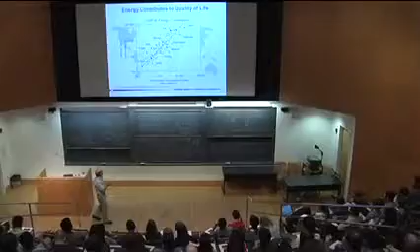This next slide makes this more quantitative. It's a plot of per capita GDP, gross domestic product, on a logarithmic scale, and energy consumption, kilogram oil equivalent per person per year, also on a logarithmic scale. You can see the relationship among all these nations, the developed nations up here.

The point I made earlier: these folks want to have that energy, not just to enjoy it in an indulgent sense, but so they have access to health care, education, lighting, heat, all the things we value so much for a decent quality of life.

The other thing interesting about this slide is look at where some of the large populations are today, and they are developing. You can conclude immediately there's going to be a big increase in the demand for energy as those nations develop. It's unavoidable. Our mission is to try to improve access to clean energy, and combustion, of course, is a gigantic part of that.

You look at that last slide and think, well, I'm just a graduate student trying to do research on a diffusion flame. How can I have any impact? Let me tell you, you can have an impact.

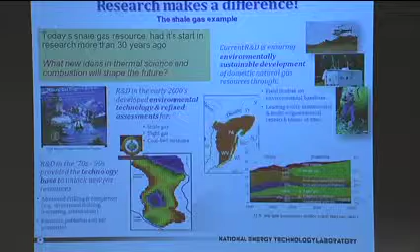I wanted to put together probably the best example I could find, and it's our own laboratory, my laboratory. You've probably heard about shale gas. Raise your hand if you know what shale gas is. I've got to make sure I know who I'm talking to.

It's transforming the energy industry in the United States within the last 5 years. There's been huge development of the shale gas resource, much of it right in the area where I live, over here in New York, PA, West Virginia. That's the Marcellus Shale Formation.

Do you know why we're able to extract so much gas from that formation? Because of work that was done in our laboratory back in the 70s and 80s: advanced drilling, horizontal drilling, being able to steer a bit and run through a formation horizontally. At that time it was called stimulating the well. Today we call it fracking. That was stuff we were working on back in the 70s and into the early 80s.

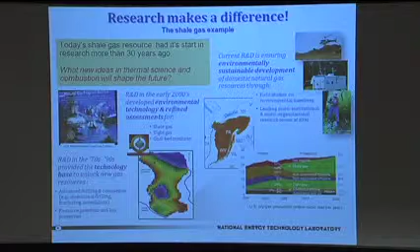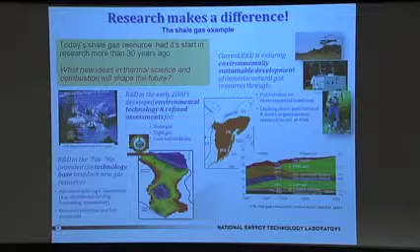Some of the people I started my career with, who have now retired, were developing that. I talked to one last week about his experiences. What an achievement to think that work we were doing, that frankly not a lot of people were paying attention to—they said it's too costly, too complicated, it'll never work—is changing the energy industry today.

Now, we kept working on it, frankly on not a lot of funding through the middle years, looking at where the geological environments were where this would work out. There was work going on, and then finally it just took off.

Look forward in time at the percentage of natural gas we expect to be supplying from those shale resources in the years ahead. It really is changing the energy industry.

Today, our lab's focused on making sure we can recover that resource, guaranteeing environmental sustainability. We don't have any problems with recovering that resource, so we're still working on that. But look at the time scale, 30 years—it's amazing. I'm putting this slide up because many of you are working in energy, thinking how can I have an impact? I'm trying to put forward a couple ideas.

It takes a while. It's not always going to be people saying you're working on the right thing. That's what's happening back here. But it pays off eventually. It really does. So I want to encourage you, keep going on that research you're working on.

You might think, oh, Gio, you picked an example here. These guys, they had it made. They were looking at something to supply a brand new fuel source. That's going to have a big impact. Well, let me give you an example. You think, well, my combustion design, I can't have that big impact on fuel supply like these guys did.

When I leave on Friday afternoon and drive back to my house in Morgantown, it will take me almost exactly one tank of gas in my little 4-cylinder truck. It'll just about be on E when I get there. Somebody in this room is probably working on an HCCI engine that in 20 years, I'll be able to take that same trip, and by the time I get there, same horsepower engine, I'll probably have 10 or 20% of that gas left. So now I get there and I open the tank and I look in there, you know what? I just discovered a new energy source, didn't I?

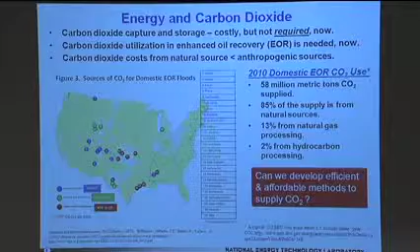You can't talk about energy today without also discussing carbon dioxide. This has been touched on a little bit yesterday. You can capture and store carbon dioxide from stationary power plants. We'll talk about that a little bit. If you would have asked me 3 years ago, I would have said it's going to happen, all right? Today, it's not so obvious we'll be doing this in the near term because of changing economic conditions, and there is actually a lot of debate on storage.

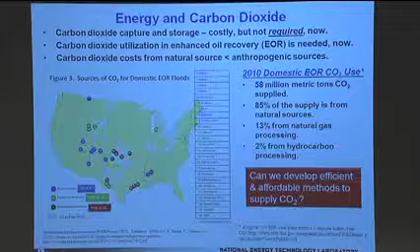Last week was congressional testimony to really question some of this. I don't know if that's the right testimony or not. I'm just telling you, this is in the middle of the crosshairs right now of a huge national debate. So will we see carbon capture and storage? I don't know.

But something that many people are not aware of, carbon dioxide is a valuable commodity today. It's used widely for enhanced oil recovery. Did you know that? If you knew that, raise your hand. I just want to see. There's a few people that are aware. It was mentioned yesterday, just a moment. But you might not be aware of how significant that use is.

In 2010, 58 million metric tons of CO2 were supplied to operating oil fields. 58 million metric tons, that's the equivalent of about the CO2 emission of 15 coal power plants, mid-sized coal power plants, get the CO2. You know where they got the CO2 to supply that? Anybody want to take a guess? Where does it come from? What's that?

Some from stripping it out of natural gas, all right? That turns out to be just about 13% of that supply came from natural gas. That's the green dots that you see here. This one in particular is one of the larger ones up in Wyoming. They produce natural gas, with it comes out of the ground a lot of CO2, and then they have to strip it out, and then they supply that through a pipeline several hundred miles down to the oil patch. Can you believe that? The huge CO2 pipeline is running across the country.

We just built another one right in here to get out to the West Texas oil patch. So you get some of that CO2 from natural gas production, but you get the bulk of it, the blue dots, from natural sources. Meaning you drill a hole in the ground and you get CO2 out.

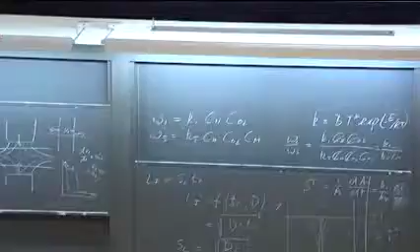The first one is just to add a scrubbing system downstream of an existing coal power plant. You can do it somewhat on a natural gas plant as well. But scrubbing is done with an amine compound, and it costs a lot of energy to take that CO2 out of that flue gas stream.

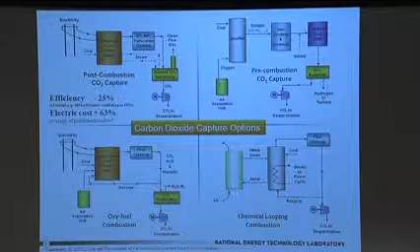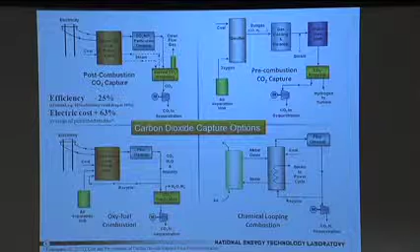This study surveyed all the reports and studies: the efficiency of the baseline power plant could drop by 25% of the original, meaning if it was a 40% efficient plant, it would drop to 30%. So that's a pretty significant hit on plant efficiency, and it means you're using more fuel to do the same job.

But you can do that to capture carbon dioxide. There are a lot of people looking at that right now.

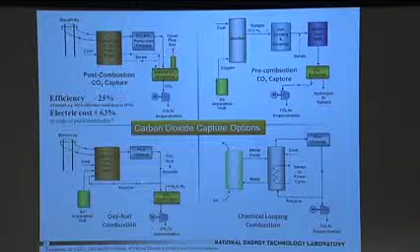You could also go before the combustion process. This is again with coal. You gasify the coal to CO and hydrogen, cool it down, and then go through the water gas shift reaction. You separate out the hydrogen that's left, and the turbo machinery, the engine, becomes a hydrogen turbine or a hydrogen engine, so you have the CO2 which you can send to enhanced oil recovery or sequestration.

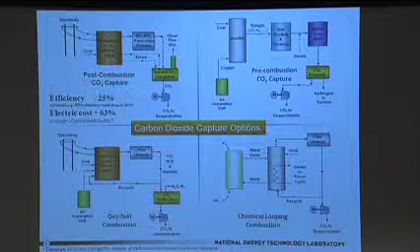The efficiency of this process, depending on who you ask, also takes a pretty big hit. It might not be quite as large, but it's not substantially better. Big efficiency penalty for CO2 capture using that approach as well.

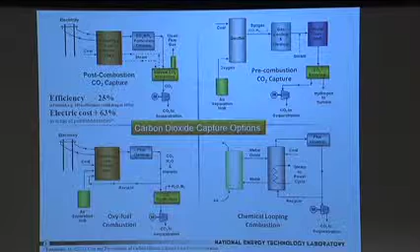Or you could go through oxy-fuel combustion. Here you take the nitrogen out of air, so you're left with oxygen, run it into the power plant, then the product stream is just CO2 and water. We're going to talk about that in more detail in just a second. It's a nice process, but it turns out the cost of getting that air is so large, the efficiency penalty is about the same as what you've got up there.

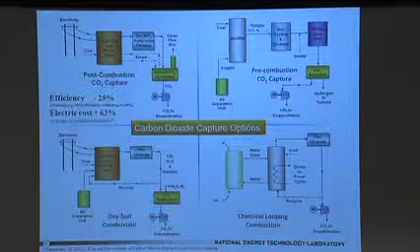So I have those three options, and one might be a little better than the other, but there's no clear winner, which leads me to my fourth option here, something called chemical looping combustion. And I hope you are just dying to hear about chemical looping combustion today, because I'm going to be spending about an hour on it, and if you're bored with it, just pretend that you're not, so I'll feel better, okay? That's my only request of you here today.

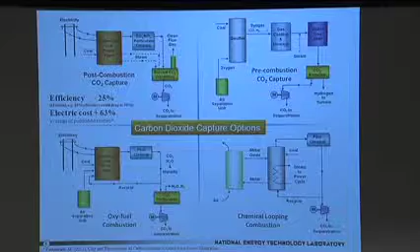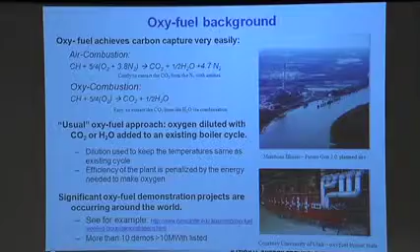All right, let's jump right into the technical details - I've wasted too much time already. Oxy-fuel, described this already. In conventional air combustion, I'm representing this like a coal chemical formula, CH, one carbon, one hydrogen. You burn that to produce CO2, water, and a lot of nitrogen. This is what really makes it complicated to pull that CO2 out in a scrubber, because you've got all that other gas - it's a very dilute stream, and that's where all the energy goes.

Oxy combustion - if I can get pure oxygen, good idea, right? The products are just carbon dioxide and water, and so separating the CO2 is very easy. Just cool it off, and there's your CO2. You condense that water out.

The usual approach is you dilute the oxygen with either CO2 or water to keep the temperatures reasonable - you don't want to make a cutting torch - and then use an existing cycle to operate the process. The efficiency of the whole system is penalized by the energy you need to make the oxygen. Everybody understands that. There are some very significant demonstrations going on of this technology in spite of that efficiency penalty.

I gave an example of some of the university work - great work going on here at University of Utah. The Department of Energy is sponsoring the ever-changing FutureGen, now called FutureGen 2 - a big oxy-fuel plant planned for Illinois, and there are other places around the globe. You can go look at that if you're interested. More than 10 demos, greater than 10 megawatt thermal. So a lot of interest in oxy-fuel, but it comes with a big price tag.

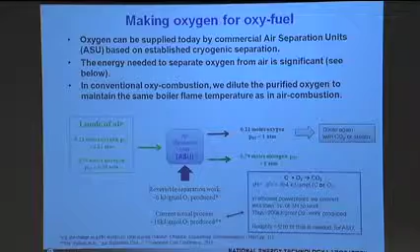You have to make the oxygen, all right? This isn't cheap or easy. I'm showing it schematically: here you start with a mole of air, run it through an air separation unit. Large scales are typically cryo units.

If you just calculate the reversible separation work to separate that into two streams, it's about 6 kilojoules for every gram mole of oxygen that you make. In actual practice, the best numbers I've found in the literature today is about 3 times that. So that's how much energy it takes to run that separation unit.

You can just do a quick calculation. You don't normally have a power plant using pure carbon, but to make it simple, we'll look at carbon combustion with 1 mole of oxygen giving you CO2. The heat of reaction isn't much different than the change in Gibbs free energy there. It's almost 400 kilojoules per gram mole of heat released.

In really the best power plants, maybe half of that, probably less than half, is going to be turned to work. So about 200 kilojoules per gram mole of oxygen, work being produced by burning that, and I needed 18 kilojoules to make the oxygen in the first place. You see where the math is going here? It takes about a tenth of the power plant output to make that oxygen.

It's a little bit better than that in practice because those plants have hydrogen in the fuel, right? But I'm just trying to make the point: separating oxygen from air costs a lot of energy and money for the cryo plant and so on. It's a big issue, how much energy it takes to make oxygen.

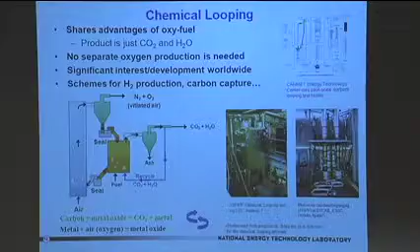This is a circulating fluid bed reactor. What I'm showing in that orange or yellow region: you can take a hydrocarbon fuel and put it into this bed of material, which includes a solid metal oxide. That metal oxide will give up, with the right metal, that oxygen to burn the fuel. I'll be left with carbon dioxide and then the reduced metal. All right, so now what do?

I take that reduced metal out of here and react it at high temperature with air. I'm essentially burning that metal. Then I bring it back around here. I now have the oxide again to go in, and I'm supplying the oxygen to my fuel reactor. If I did all that, the product stream is just CO2, and if there's hydrogen involved, water as well.

Okay, does that make sense to you? Please make sure I got this point, or you'll really be bored. Everybody on board with me on this? Okay, that's how chemical looping works.

That's how the process works. There's a lot of interest in this worldwide. I'll show in just a moment some sketches of different reactors. There are other schemes for hydrogen production that I won't cover today. There's even an interesting one for carbon capture, but I'm just not going to have time.

Go ahead. So all the oxidizing is from metal oxide. That's right. Yep, you'll see how this works in just a second. Almost too good to be true, but that's how it works.

Let's just take a look at the fact that this is supposed to be new technology. Well, it's not quite new, it's been around, though the drivers and the context are quite different. There's a patent that goes back to 1954. I took this sketch out; these guys, it was for a chemical company. They were interested in producing pure carbon dioxide for some chemical purposes. You can see in here, it's the process I just described: the fuel goes into this reactor.

The metal oxide, which I've colored red here, reacts with the carbon fuel to give you CO2, and then the blue is the reduced metal. That reduced metal then goes through this reactor, where it reacts with air to give you the metal oxide at this point, and then that metal oxide is cycled back through the other reactor.

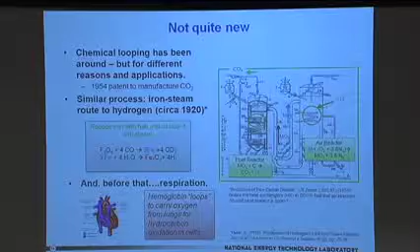A lot of people are looking at this right now, a lot of interest. I took these two things from a great talk by Henrik Leion and then the late Adel Sarofim about a year ago in Clearwater. A number of people are looking at CLC as potentially becoming the preferred option for steam boilers - remember that thought, we'll get back to it.

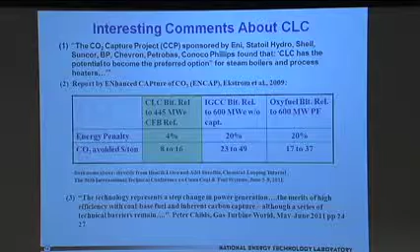These guys looked at power generation from an oxy-fuel 600 megawatt pulverized fuel coal plant, and integrated gasification combined cycle - pre-combustion capture. They calculate the energy penalty of removing the CO2 versus some baseline: 20% energy penalty. Look at that. Then they looked at chemical looping combustion with a CFB combustor: 4%. If that's right, that's a huge improvement. I'm really interested in understanding, can I do this? And the cost of CO2 avoided is much, much lower.

So the question is, is that really right? Can we really build devices like that? There's another quote for gas turbines I won't take the time to go through today. But again, a lot of people are looking at this in different parts of the world. We've talked to many of these folks and have different kinds of interactions.

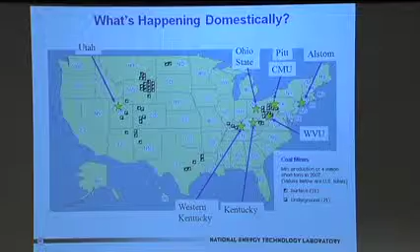Maybe I've missed somebody domestically - if I have, please let me know, we'd like to talk to you. We're trying to really provide leadership on this topic. We've been talking with people at Utah as one example and other places. This slide shows different groups working on this domestically at different universities. Alstom is one of the few U.S. entities pursuing this commercially. It's interesting that all the universities working on this are located right near places where coal is being mined - isn't that interesting? But I'd like to see that grow. So you guys from the California schools, come on and work with chemical looping combustion. That'd be great.

Let's get into the details of chemical looping combustion, starting with some basic concepts for thermodynamics. The idea - I'm just using coal, but this could be any hydrocarbon or carbon. We want to react it with oxygen to produce CO2, and there's some heat of reaction connected with that step.

You can break that down into the two chemical looping steps. First, I react the carbon with the metal oxide to reduce the metal, then I take the metal and oxidize it to get back to the metal oxide. Obviously the heat of reaction of these two has to add up to the one on top. A key point here, which took me a while to notice - this doesn't have to be exothermic itself. This one can be endothermic or exothermic. The two of them have to add up to give you an exothermic reaction overall.

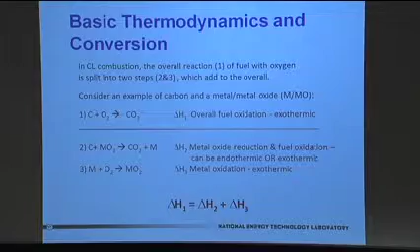You're going to see that as we move through these talks. For some of these metal systems or sulfate systems, some can actually be endothermic, but then you have to make the heat up in the other reactor. I think I'm connecting with a few people who are following me on that.

So let's look at potential oxygen carriers that have been studied. This was the question that was asked - I'll get to that in a second. Does it have to just be metals? There's a whole list here.

Professor Fan's book from Ohio State is a good reference. It just came out fairly recently, and I put a lot of the slides together from a couple of charts he had there.

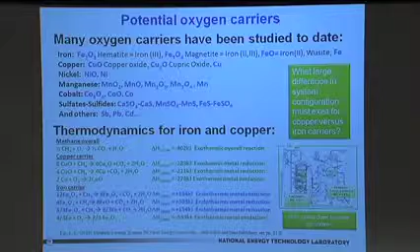A very common one we're interested in is just plain old iron in its different oxidation states. A key point you need to understand is some of these metals have multiple oxidation states, like iron. It goes through iron 3, 2, 1, and then just iron. That makes it an interesting problem to understand how it's going to react in the system.

Copper is another really good one. It has 2 oxidation states to get the oxygen off. There's a lot of literature on nickel, and those guys are really brave. I don't want any nickel powder in my lab - it's just too hazardous to work with. So we're not looking at nickel in our lab. For people that are, I'm sure they're taking the precautions to use it, but we haven't done much with it.

You go down the list here - here's some of the other ones. The sulfate-sulfide transitions: calcium sulfate to calcium sulfide. Lots of oxygen on that molecular compound coming off every time it goes around the loop. It's a good oxygen carrier, but has some issues with maybe stability when you go to use it.

That one's being pursued pretty aggressively by Alstom for coal applications. So let's look at some of the thermodynamics just for iron and copper. I don't mean to exclude the others, but these are the common ones people are working on.

If I was going to use methane as the fuel, I have this overall exothermic reaction for burning methane. If I use copper as my carrier, I have 2 oxidation states where I can reduce that metal - go to cuprous oxide, and finally down to copper, producing CO2 in both of those things. Then finally, I need to reoxidize that copper to get back to copper oxide.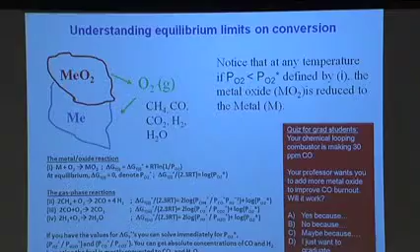Well, I haven't even started to think about how well I can convert fuel with that metal oxide. Need to answer that? Well, that's an equilibrium question to get started here. Let's take a look at it, and just understand how this equilibrium works when you're trying to burn fuel with a metal oxide.

Here's a sketch of a partially used up oxygen carrier, metal oxide next to some metal, and that metal oxide metal pair at a given temperature obeys the equilibrium written down here, equation number I. What it's telling you is there is a partial pressure of oxygen where this is at equilibrium at any temperature. So at 800 degrees centigrade, there is one partial pressure of oxygen that puts that system in equilibrium.

If I drive the partial pressure of oxygen higher than equilibrium, PO2 star, what happens to that system? If I've got a lot more oxygen, what's going to happen? You'll oxidize the metal, right? This thing will start to grow and that'll shrink. If I drop the partial pressure of oxygen below it, what happens then? It goes the other way, right? That's the equilibrium. It's that simple.

So how do I control the partial pressure of oxygen over here? With the fuel, right? That's what combustion is doing. It's trying to reduce the partial pressure of that oxygen, and as it does that, it pulls the oxygen off into that reaction set and leaves the metal behind. Okay, so that's how the equilibrium works in these systems.

And if you're patient tonight, you can just sit down, and I didn't put the numbers in here, but if you've got a table where you can look up the standard Gibbs free energy, you can calculate those ratios, you can figure out what that is, you can see right where the equilibrium sits.

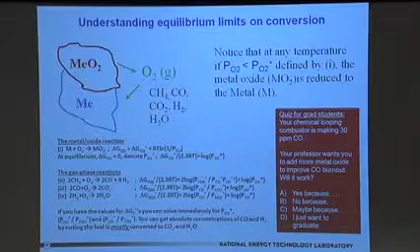What do you think? By the way, when I take multiple choice, somebody told me, always go with your gut feeling. So is that right? Adding more will get rid of it? Yeah, if you didn't have enough, right? If you didn't have enough, that's the caveat. For some reason, I found this conceptually hard to accept.

Think about it. You can have as much surface of metal oxide as you want. You aren't going to change PO2 above it, right? It's only going to do what we said if you didn't have enough metal oxide. So the correct answer is, of course, maybe. I had a law background, so it's not 'no' - it's maybe, because you don't know what's limiting it. But the point I'm trying to make is, if you're already at equilibrium, you can add as much metal oxide as you want and nothing will happen. That's the nature of this heterogeneous equilibrium.

I'm looking around, I'm kind of picking up a couple people like this and a couple people like this, and a couple are saying, I just want to graduate. Come talk to me at the break, we'll work it out from there. Not the graduation, the details.

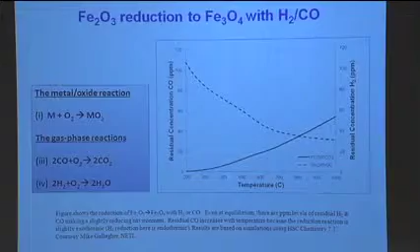If you're doing something else with it and didn't want that much CO, you could bleed in just a tiny bit of air and take it all the way over. Then you'd have a little bit of oxygen, a little bit of nitrogen.

Okay, so that's equilibrium. What are we doing time-wise here? Solid carbon formation, is that an issue? Let's see what's going on here.

What's that? I can't quite hear you. It'll get burned in that air reactor and go out as CO2, right?

So it wrecks your whole hope that you're going to get CO2 in one reactor. It ends up coming out of the air reactor, right? It can, I think you said follow it up. I apologize, it's really hard to hear.

Yeah, you have to worry about carbon formation, not just by equilibrium, but by cracking, and then you can follow it up, to use your phrase. You're absolutely right. It's probably not much of an issue to worry about carbon formation in the reactor itself.

But a key point I want to leave you with is, even if you form carbon on the metal oxide, is that a problem? Probably not—it's trying to react with it. I'll show you why in just a few minutes.

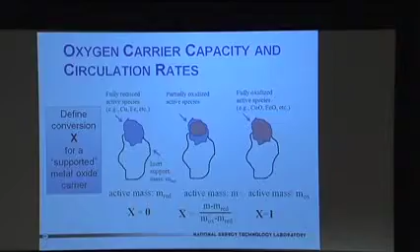This is the metal. It's going to become a metal oxide, and it's sitting on maybe an inert support. It doesn't have to be—sometimes you can have pure metal, but we just need to define that this is the state.

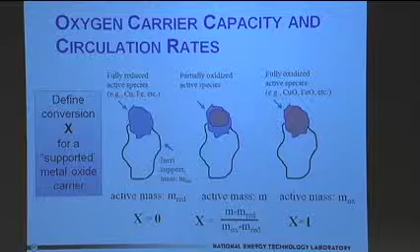If I take the mass of the active species minus its reduced state—what I start with here—then divide by the mass when it's fully oxidized minus its reduced mass, that gives me this quantity X, which is the conversion. So the fully reduced material has X0, the fully oxidized material has X1. From 0 to 1, it's just a convenient way to tell you how much of that carrier you're using. It doesn't have anything to do with how much inert is present.

And then you can develop some other nomenclature that's going to be a little bit useful. That's X I just described. This is the oxygen transport capability, basically the difference between the mass of the carrier when it's oxidized minus when it's reduced, divided by the initial oxidized state. So this is telling you what fraction of the mass of the active material is going to supply oxygen.

So if I say I have an R0 of 0.1—let's say I have a kilogram of material with an R0 value of 0.1—how much oxygen can I get off of it? Can you answer that? I have a kilogram of material, R0 is 0.1, how much oxygen could I get off of that? Say it good and loud.

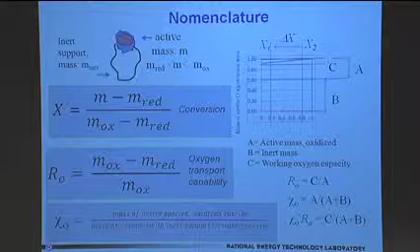Oh boy, I'm losing you. Maybe it's time for our break. How about it? Actually, I don't know what time I'm supposed to break. Oh man, this could be okay. Do me a favor, just stand up for a second, stretch. I don't want to lose you on this point. Just take a quick break here. I don't normally give the lecture three hours long. I don't know if that happens at your university. It's really a challenge. You hit the camera?

All right. Doing okay? Let me get you focused here again.

Let me try one more time here. Now that we're at a quick break, let's see if you can answer that question about the R0 quantity, the oxygen transport capability. It's the difference between the oxidized mass and the reduced mass, divided by what you started with when it's oxidized.

So let's say it's 0.1. Suppose I had a kilogram of oxidized material. How much oxygen could I get off of it? 0.1 kilogram, right? It's real straightforward. It's just a fraction of that oxidized material that can go to oxygen. That's all it is. It tells you how much oxygen can come off the system as you go from oxidized to reduced state.

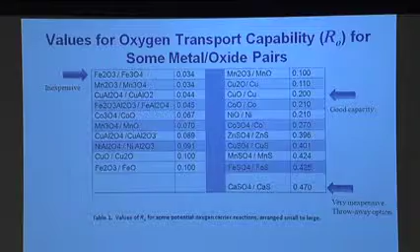If you keep going and look at copper oxide going to all copper, that's 0.2, so now I've got 20% of the mass of that material becoming oxygen. Then if you go to calcium sulfate going to calcium sulfide, almost half the material mass can come off as oxygen. That's a really appealing oxygen carrier because you don't have to circulate as much stuff around, right?

Does that make sense? The difficulty is every one of those has to have long-term durability, because there are other factors besides just their oxygen capacity when picking them: how much do they cost, how durable are they, will they work in my system hydrodynamically? There's a whole bunch of issues we'll get into. So you go down this list and think about what you want to pick. This chart tells you the oxygen capacity available to you on that carrier.

Let me give you a little test to see how well this is going. Does this property change with temperature? No, it does not. It's a fundamental property of the material, taking it completely from an oxidized to reduced state. But if you reach equilibrium, then you're right, because equilibrium will not let you take it to the oxidized state fully; it's going to go one or the other. At a certain temperature, you can't take it over because equilibrium is pushing it the other way. We'll get to what that means for flow in just a minute.

So let me ask a question now. I'm going to pick one of these oxygen carriers, let's pick this one down here, R0 is 0.1. Now I'm going to build a system, a combustor, with that material with R0 of 0.1. I want to circulate 100 kilograms per second of oxygen carrier around the loop. So how much oxygen can I supply if I've got 100 kilograms of that material going around? 10 per second, right? So if I know I've got 10 per second of oxygen, the next thing I say is how much fuel I can burn with that, knowing the heat output of that boiler. It's very straightforward, no deep math here or anything.

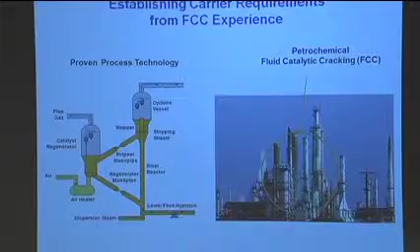FCC is fluid catalytic cracking, and we've got a number of chemical engineers here in the audience today. The idea is you put oil in here, it goes onto a catalytic reactor, it does a cracking reaction, and it forms a lot of carbon. Then you take that solid catalyst and run it back down to this bed where air goes through, burns off the carbon, and you recycle that catalyst around.

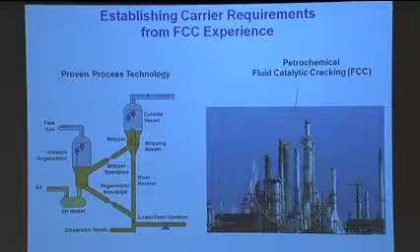It's a lot like chemical looping. This is known technology, being used all over the world, and it circulates a lot of material around that loop. So we said, look, I don't want to reinvent the wheel. What can I do practically for chemical looping that's at least in the same scale as that circulating solids?

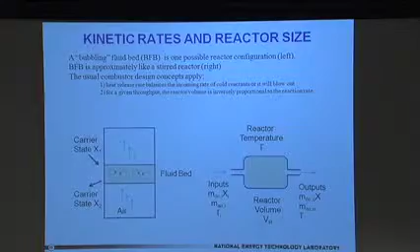This is just an example of a bubbling fluid bed. You put air in the bottom of the thing, there's a solid material in it, and it will fluidize. We'll show some of this in detail in just a moment. It behaves much like a circulating or stirred reactor bed. Air is moving through that bed. You put in a carrier at the top, and in some designs it would come out the bottom as you try to oxidize it. You'd have a similar bed over on the fuel side.

If you want to treat that like a stirred reactor, it starts to look like a conventional combustion problem, and the usual combustion design concepts apply here. The heat release rate has to balance the incoming rate from cold reactants, or the thing will blow out. So that's how you put together a design, just a mass and energy balance, and that volume is going to be inversely proportional to the reaction rate. That's why kinetics are so important.

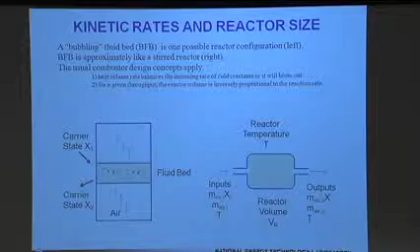So you see where I'm going to go with this? It's a conventional combustor, first order design. How do I scale the thing when I know the kinetics? Well, you have to actually have the kinetics of the process, and I don't know how many people here are doing heterogeneous reactions and heterogeneous kinetics. It's a little bit different when you have to do a heterogeneous system.

The common way to get started is in a TGA, so you put the sample on the pan, run the temperature up, and just weigh the change in the weight of that pan, and that's how you get the kinetics. You just watch the reaction occur. In many ways it's easier than doing kinetics on a gaseous system, where you have to track individual species. For example, if you want to do the oxide reduction, you can just go back and forth with the sample on the pan, and we'll show you this in a second.

But one of the complications you run into is, what if I'm interested in coal? I put the coal in the pan and run one test. Well then what? You have to take the pan out, dump it out, take the carrier out from the ash, put it back into the pan, and go through the next cycle. So people doing kinetics on these systems are very patient. If you see any of them, buy them a cup of coffee, they're going to need it. But we've done it, and actually Tom Simonyi has emptied a number of pans and so on. That's how you get kinetics in these systems.

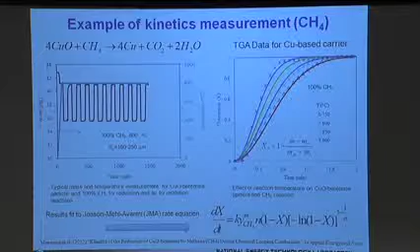Do the same process for oxygen, and then you can fit to kinetic expressions for the kinetic rate of either oxidation or reduction, and there's an example of one right there. So fit the data to those kinetic expressions, and that allows you to go back in and... oh, didn't skip one. I wanted to show this slide just to give you a little bit of insight that these reactions are, to me, surprisingly fast.

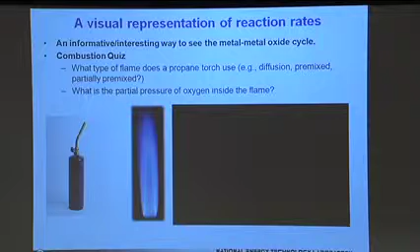All right, so I'm going to show you this movie. I hope I can set the stage while I get it started here. Before I turn that movie on, I need to actually leave there and find the movie because it didn't play earlier off the PowerPoint. Let me ask you a question. We're going to do this with a propane torch. So what kind of flame exists in a propane torch? Is it premixed, partially premixed, or a diffusion flame? You guys should know this, right? What's that?

Oh, the air ports are open. Let me show you, I didn't think this would be that. You'll need to know this to watch the movie and make sense of it. This is what the flame is. We're going to get another break if I'm not careful here. There you go. You just want to use the real thing?

I was actually going to bring a propane torch. There we go.

Watch the movie here, so here we go. Here's a little experiment. There's a propane torch that we're going to light, and those are just two copper wires that I put on a piece of wood. That's my basement, by the way, see what I do for fun. It's kind of sad, but so there's a torch, and that's a partially premixed flame. You can see there's some burning occurring up above, so the partial pressure of oxygen in that flame region is pretty low.

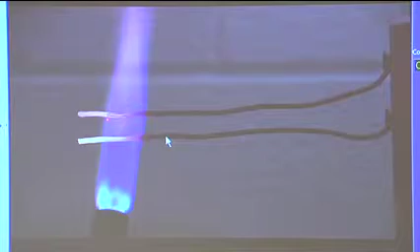Now you tell me, what color is copper oxide? It's brown. What color is copper? It's that shiny color right there. See it? Watch it as the flame goes back and forth. You can see it, at least on the outer surface. I would argue what you're doing is you're reducing the copper oxide, and as soon as the torch moves away from it, it's sitting in air at high temperature, and it goes back to copper oxide. So I just thought it was a great visual representation to see going back and forth between the oxide state and the reduced state. I'm pretty sure that's what's happening there.

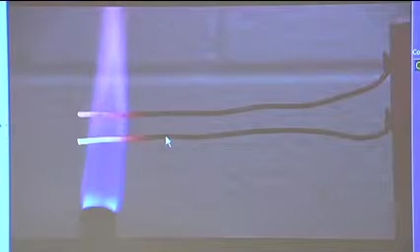My basement is not the most scientific environment, but I just did that and realized, because I'd seen it when I was soldering something, and it dawns on me, hey, I know what I'm looking at here. Reduced state, oxidized state, right? So I took that little movie. Also, I got a new camera for Christmas. You know, most people take vacation photos, but anyway, that's just what we do at our house.

Okay, I better get back into the main talk there. And yes, I did want to bring the real torch, but I just wasn't sure how that would work here. So let's go back. All right, where are we? We're talking about kinetic rates. And if I can get down to where that belongs now, right here. So we know something now about kinetic rates.

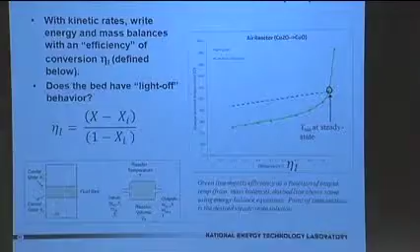They're not super slow, we've measured them in the lab, and then what you can do, what I think probably all of you could do, just given a little bit of time, is just go through, take those kinetic rates, write an energy balance and a mass balance on a stirred reactor, define a conversion, which is, as I've defined it here, define an efficiency, which is the conversion going out of the reactor minus what's going in, divided by 1 minus the conversion. So it's going to try to get to 1 up here. So that's the efficiency of the so-called combustion in that reactor.

And you can then plot the results up right here. This is the thermal balance running along this way versus reactor. Here's the reactor temperature inside that stirred reactor. And what this is saying is, as I convert more of that material, this happens to be for oxidation of copper, I'm releasing heat, and so the temperature rises linearly with the conversion. That's why it's just a flat line moving along that way.

This is the kinetic expression. All it's telling you is that to get to fully converting that material, to get further out this way, I have to go to a higher and a higher temperature. Where those two guys meet, that's where the reactor is going to operate, right? This isn't any different than doing blow-off in a gas turbine combustor. Same problem, it's done exactly the same way.

Now, the interesting point here is, I asked the question, does this thing have light-off behavior? Light-off, by which I mean, can you make it ignite and blow it out? Well, it doesn't for the example I've got here, right? Look at the temperature profile here. It's just flat. If I go over this way, there's not two solutions to the problem. There's no light-off behavior.

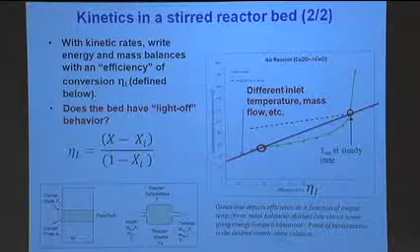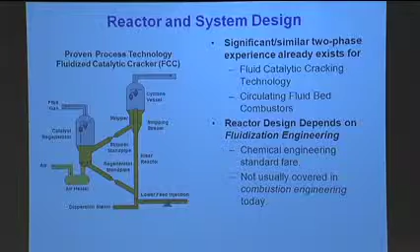So let's take a look here before our break at the reactor and system design for this type of technology. I've already described it - we have experience in fluid cat crackers. There's also a large body of experience in circulating fluid bed combustors, something more familiar probably to this audience. But I've noticed that the reactor design depends on fluidization engineering. I'm not sure many mechanical engineers or combustion engineers study fluidization. Anybody? Looking around the room here. Anybody got background? I know at least some of the Utah group is involved in this, but probably not anybody else. So it's an interesting area, I just want to touch on it real quickly.

Important point I want to make here: the recycled solids in these CFBs, the mass flow rate, is significantly larger than the flow rate of fuel going into the system, like 100 times. It's interesting, you don't realize that until you start to study these systems. Because you look at chemical looping and say, oh, I've got only 3 or 4% mass of oxygen on that carrier going around the loop - doesn't sound like enough. Well, it's not any different here. You've got like only 1% or 2% of fuel going around the loop. So we have a lot of experience with these systems, and I just want to make that point.

Again, one of the things about the system - because there's so much mass circulating around that loop relative to the heat release rate from that small amount of coal, the temperature is almost uniform in there. You're going to see that in chemical looping. I talked about the endothermic fuel reaction, like, oh, how do you get the heat in there? Well, you don't have to - it's going to come over with the carrier because you've got so much material going around. Turns out you just take your heat out of the air reactor. It's probably adequate. We're designing that right now.

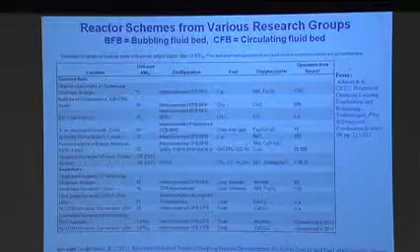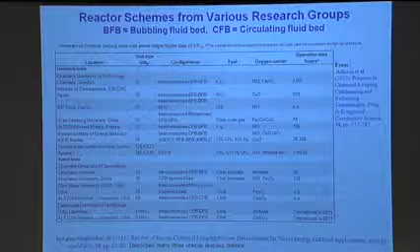This is just a list of different research groups and the type of reactors they're using. You can see they're all CFB, bubbling fluid beds, all the way down the list, and the number of groups building these up. The one at our lab isn't in here right now. I'll show it to you later because we're just getting close to turning it on. But anyway, we'll take a look at that a little bit later. I just want to let you see there's a good citation here, you can go in and look at all the different reactor designs people are looking at.

Then there's fluidization. It's not covered in most combustion courses, so I've got a couple of slides here to show you what fluidization looks like. This is from some of my colleagues at NETL. They do a lot of work modeling fluid bed systems. If you decide to work in this area, go to that website right there. You can get free software that's probably some of the best around for modeling fluid bed systems.

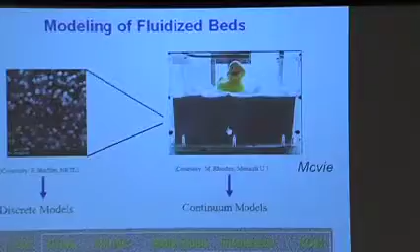Let's show what I mean by a fluid bed. The larger insert is looking at individual particles in a bed when it's fluidized. This is a bed of, imagine it as sand material. What you'll see when I play this movie is air supplied from the bottom, fluidizing the system. This one should play properly. There you go—you can see what happens when you fluidize it. Things float just like it's on water.

If this is hard conceptually for people to grasp: once you add enough air, the friction between those individual particles is gone, so they don't support a shearing stress, and it becomes like a fluid. That's why you call it a fluidized bed. You can make that material flow much like you would flow water. That's what you want to do in chemical looping, flow that solid material around just like it was water. I guess you guys like the rubber ducky—I'll tell my buddy Shahnam.

Let's see what this looks like, simulation and experiment. This one I don't think is quite in here. What you're looking at is a comparison for simulation of a chemical looping system. We'll get started here. Wrong one, my apologies. This one—okay, there you go.

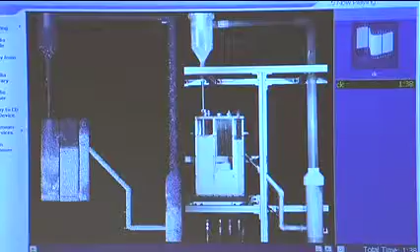The sketch on the left is the simulation we're doing of this chemical looping system. This is an air reactor running up in this direction. You can see those particles going up, separated out in a cyclone, dropped into this, which is actually a seal reactor, and then this is where the fuel combustion is occurring down at the bottom, and this is another separating reactor. If we were doing solid fuel, the idea would be to fluidize this reactor so that as that carbon is burned, the remaining ash, which is pretty small and friable, comes out of the top. You don't see it in this simulation. Again, this is a loop seal running around this way, taking you back down to the air reactor.

My point on the slide is we have pretty good simulation capability to design these reactors. You don't always have good chemistry in them, but this is a hydrodynamic simulation.

You can compare it to this one-to-one lab scale environment that we were running to do a validation of this. It looks pretty good to me, but do you see anything wrong between the two? Just check. What do you see noticeable?

Any noticeable difference there? The level of the bed in the middle, right? It's off. I'm an experimentalist by training, so I can't resist pulling the chain on all the modeling guys. Look at that, you can't even get the bed height right. To finish the story, we had the experiment set up wrong. We fixed the experiment, and got almost virtual agreement. So we're really proud of the hydrodynamic capability.

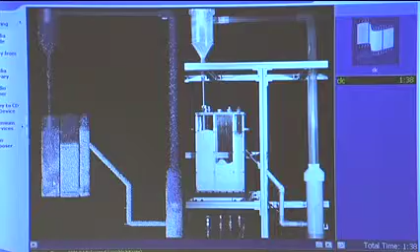There's a question here about slugging in the transport reactor. Is that ever an issue with the kinetic rates on overall system performance? Yes, it is, actually. You want to avoid that slugging.

It comes from the geometry right in this region here. You have to neck that down, because above the bed you tend to push material out of the top of the bed, and it sits up in the gas phase. You want at a controlled rate to entrain that into the neck down and bring it up. So the way you solve that problem, which we actually had to do when we were designing a bit more, is by changing the entrance region so you don't just get slugging.

It is sensitive to that part of the design. It is a problem if you slug through that area, because then the kinetics don't match. Anybody else? No? Okay, we're almost at our break here. I'll just pound through a couple more and get to 3:30.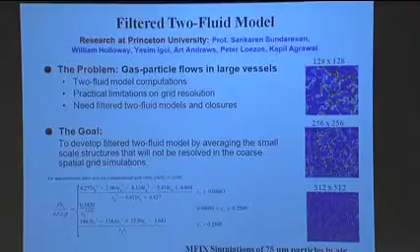I'm not going to talk much about this. I want to throw the slide in to mention that Princeton University is a key ally in our simulation of multi-phase flow. My colleague Madhav Syamlal works pretty closely with Professor Sundaresan, so I put this slide in. Wasn't sure if anybody from that group would be here today, but I won't spend any time on it. Let's look quickly at solid fuel combustion.

Specifically, everything I've said today about chemical looping has been general, talking about gaseous fuel chemical looping, but I want to spend just a moment on solid fuel combustion. We started this work a number of years ago, and I was really questioning whether you could get a fast enough reaction rate between solid coal and the solid carrier. How fast would they react together?

So we put them in a TGA pan, and again there's weight versus reaction time, and the blue line is the temperature as you drive it up in the TGA, up to the operating temperature of about 1,000 in this case. So what we did first was put coal on the TGA pan and drove the temperature up. You can see the volatiles coming out. We did that initially in nitrogen, then added oxygen, and you burn up the char. You can see the weight go down.

So that makes perfect sense. What you're seeing on the TGA pan is just devolatilization, moisture out, and combustion of the char that's left over with oxygen. Then we loaded the pan up with the same similar coal, but put in a metal oxide - I think it would have to be copper oxide in this case.

And then we just started heating it up, with the temperature going up. By golly, the carbon was being consumed by the oxygen from the metal oxide, with the atmosphere pure nitrogen. So you're burning up all that carbon with the oxygen coming from the copper oxide. And then of course we reoxidize the copper when we introduce oxygen, so the weight goes back up. Well, that all made sense - I said that's fine, we expect that to happen - but the rates were way better than I expected.

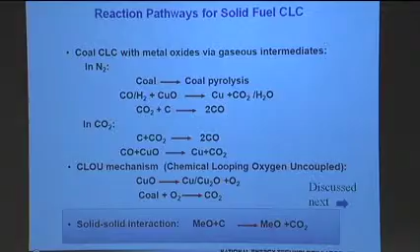The difficulty you run into is the copper oxide, in this case, tends to get pretty soft when you get up to those temperatures where you're driving the oxygen out. So you get a lot of agglomeration. So how do you take that agglomerated material and reoxidize it?

It's a problem. But then there's one more mechanism that's interesting, and all these are important. I just thought I'd like to talk about this one because it's interesting to me. I hope it's interesting to you with only 10 minutes before your break, but we'll go through it quickly and wrap this part up.

So you take metal oxide and react directly with the solid - the two solids reacting together. I didn't think that could happen, I'll be honest with you, but we kept looking at the data we had, and we came to some conclusions. It must be happening. Here's why.

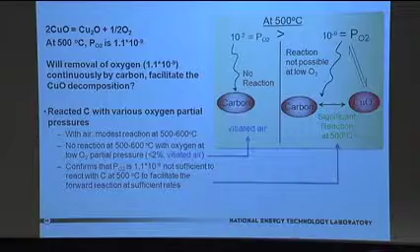So what I'm showing here is a representation of some experiments we did. We did these experiments at 500 centigrade with copper oxide - the partial pressure of oxygen over copper oxide at that temperature is 10 to the minus 9. So we said, can removal of oxygen down to that level actually make the reaction go significantly with that oxygen partial pressure? All right, let's go figure that out.

So we started off and said, well, let's just take some air and go in at 500 degrees. Air has got plenty of oxygen. And we had a pretty modest reaction that we were seeing occur.

So, all right, let's now take vitiated air, 2% oxygen - way more oxygen than the copper oxide case, lots of oxygen still, but vitiated compared to conventional air. It just sat there on the pan, didn't react. The reaction was so slow you wouldn't even notice it.

The funny thing is, at that same condition, if we put these two things in the pan together, where the partial pressure of oxygen is 10 to the minus 9, it just went like crazy - burned the stuff up. Why is that? Well, the only conclusion we could have was they must be reacting together, solid to solid, touching each other. Which again, I protested against. I said, that can't be right.

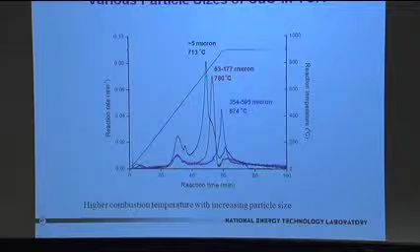So we said, all right, let's do some other tests. Here's another TGA run - this time I'm showing the rate of reaction that we observed on the pans, how fast these things are reacting. Here's the temperature rise in the TGA. It's loaded up with 100 micron size coal with these copper oxide particles.

And what we ended up doing was changing the size of the copper oxide particle. We just kept grinding it out thinner, and what do you see? You get a higher reaction rate, earlier on, at lower temperature, as you get more intimate contact between those smaller particles and their large neighbors. I said, I'm still not sure I believe that.

So we went on here. We said, well, let's keep the particles the same, but let's just separate them. So we took the same amount of material but diluted it with - I can't remember what the material was, it was a quartz that we diluted the material with. This was the original sample of carbon and copper oxide. Then we put in 5 times as much quartz so things would be separated, and put it on the pan. And then 10 to 1. And sure enough, you have to go to much higher temperatures to get the reaction to occur - it's a slower reaction as you separate these particles.

We're starting to piece together a little bit of a story about what was going on here. There's more to this.

We ended up doing DFT calculations and showed all this. Anyway, we came to the conclusion, going over the paper, that these two solids actually do react together.

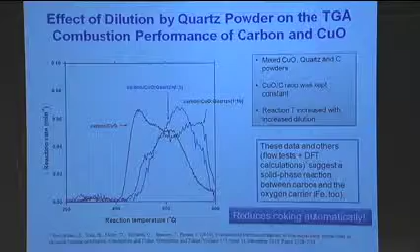I'm not planning on building a reactor to grind up my coal and my oxygen carriers so they hit each other—that's not the point. But what occurred to us was, if I do have coking on the carrier, it's going to be right next to the metal oxide, and it'll react. That's why I'm not really worried about coking with heavy fuels on these things. As long as I've got oxygen in the oxide state, I think it's going to show up by this solid reaction. We could talk all day on this—we've looked at it a lot, and I think that's the right conclusion.

Around the same time we were doing that, we didn't know this—we found it almost serendipitously. Mike Zachariah at University of Maryland was doing some similar studies, and we ended up joining forces on this.

To make that same point about this solid phase reaction, this is an experiment he runs called temperature jump mass spectroscopy. The image you see is a wire, about 50 microns, that he applies a voltage to for really rapid heating. He puts solids on that wire to study their reaction on that surface, using a mass spectrometer to look at the material ejected from the reaction. So you can track that reaction, driving it very fast with heat from the wire in the middle. Here's what he found.

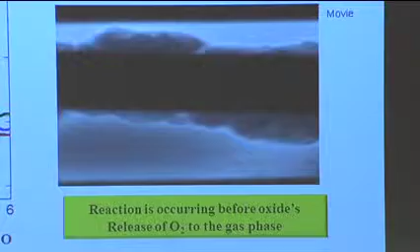He started with just a plain copper oxide coating on the wire, and tracked the oxygen coming off it. You can see two runs here for repeatability, and the oxygen starts to emerge after about 2 milliseconds.

But when he put copper oxide together with solid carbon as the coating and started heating it up, you see CO2 coming off before the oxygen even had a chance to get out of the metal oxide. Does that make sense? It's likely those metal oxides are reacting together in that environment—I can't think of any other explanation for the data.

He made a nice movie of that, and I'll show this, then we'll wrap up before our break—it's just fun to play. What you would see is the material disappearing off the surface of the wire.

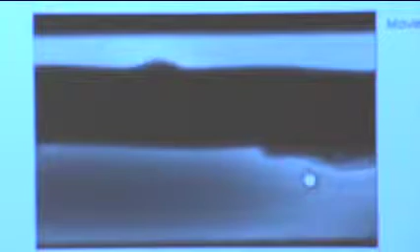It's a great experiment for understanding heterogeneous chemistry, because he can watch those species as they fly off the wire during heating. My hat's off to him—we are working with him today on understanding some of these processes even more.

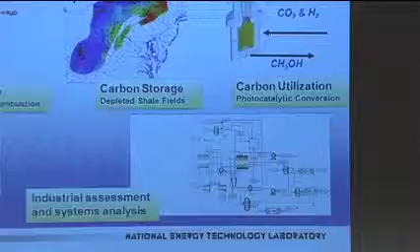It's just a minute or two before 3:30. I'm going to skip a number of these slides since we'll switch to a different topic after the break, but I've tried to give you a broad overview of chemical looping. Our lab is very active in this area right now—we have a project called the Industrial Carbon Management Initiative, developing chemical looping combustion as a technology for industrial applications. We're also looking at taking the CO2 from that process and using it geologically to enhance recovery of natural gas from shale deposits.

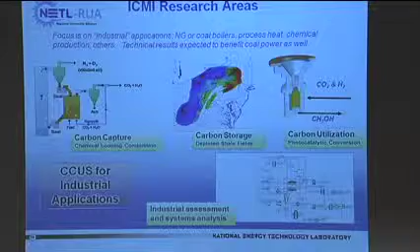This hasn't really been done before, but 20 years from now, when they deplete those deposits by primary production, we've got infrastructure where we could probably get even more natural gas if we had CO2 to inject. We're already looking at that, and I've talked with someone in the audience interested in our work on photocatalytic conversion of CO2. Not going to have time to cover all that—just want you to know we're actively working in these areas, so if you're interested, come talk to me. I'd be happy to talk to you.